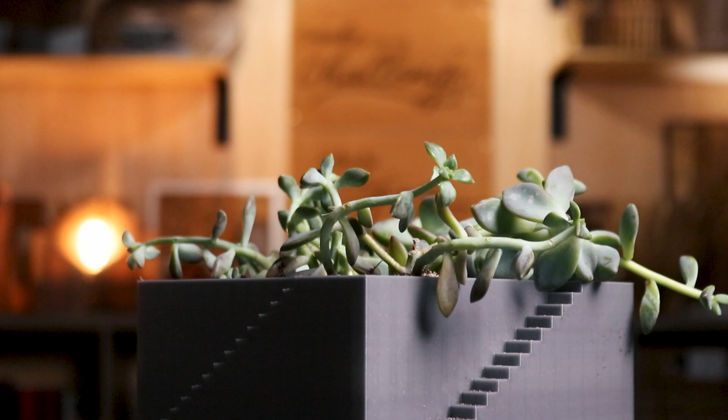There are so many beautiful 3D printed planters and products being made all over the world. From a quick search on Google, you can see all the variations in design. After seeing all these projects, I was inspired to merge architecture with flower pot designs to create miniature worlds for houseplants.

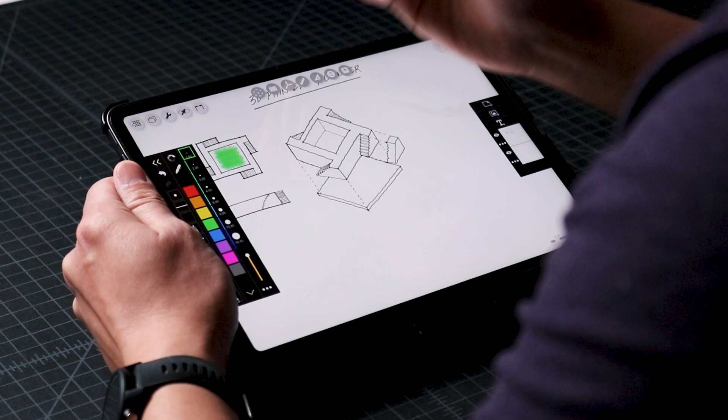To start, I came up with a quick sketch of my idea using my iPad Pro, Apple Pencil, and an app called Morpholio Trace, which I'll link in the description of this video.

The idea was to create an architectural plaza with stairs at 4 corners leading up to a walkway. At the center, there would be a void for soil and plants. At the bottom of the void, there will be 6 small drainage holes so excess water comes out of the bottom of the pot. That means we also need to have a drainage pan to catch excess water.

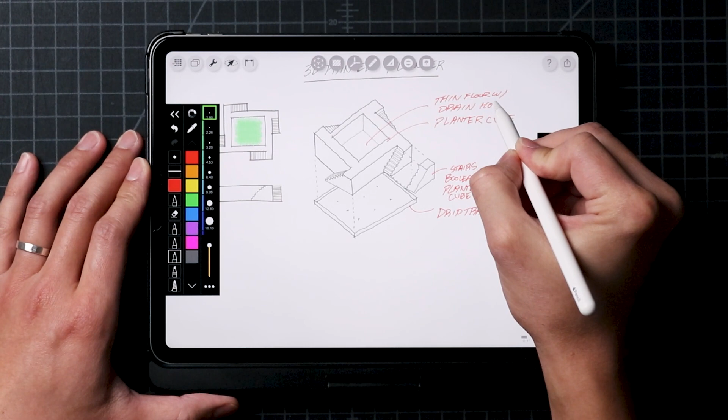The pan will have stubs that raise the planter off of the surface so that all the excess water can completely drain out of the pot.

With the sketch complete, the next step of the design process is to create a 3D model of the project, which we'll send to the 3D printer.

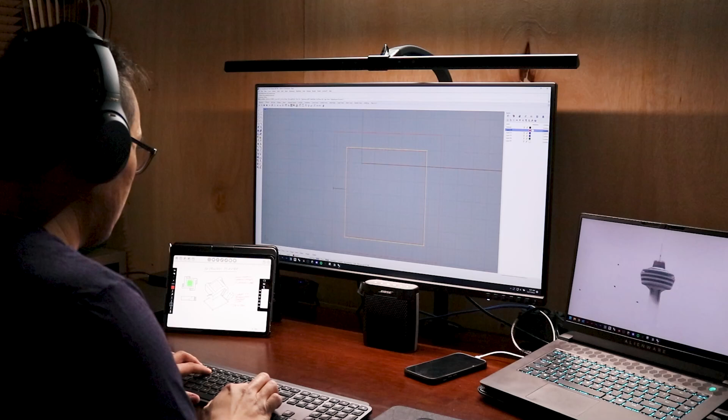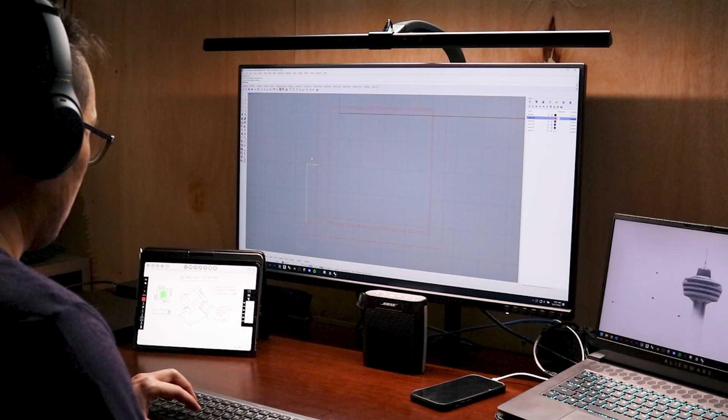After I drew the general shapes of this project, I outlined the shape of the staircase. When we get to the point where we model the stair in 3D, we'll see how it looks and see if we need a different proportion.

I have a feeling that the stairs will need to span the entire length of one side of the planter. The last thing we need to add to the design are the drainage holes at the bottom of the planter. I decided to go with 9 small holes that are evenly spaced to form a grid.

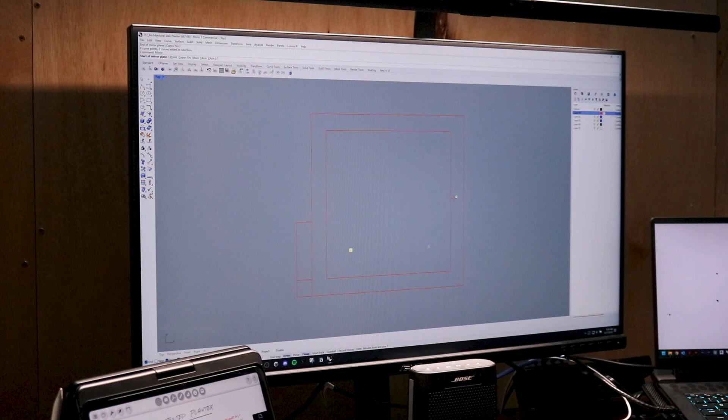Now we're ready for the fun part, extruding each component. Starting with the base, I extrude the overall square with the drainage holes to create a 1/16 inch thick platform. Next, I extrude the planter wall so that the top is 3 inches.

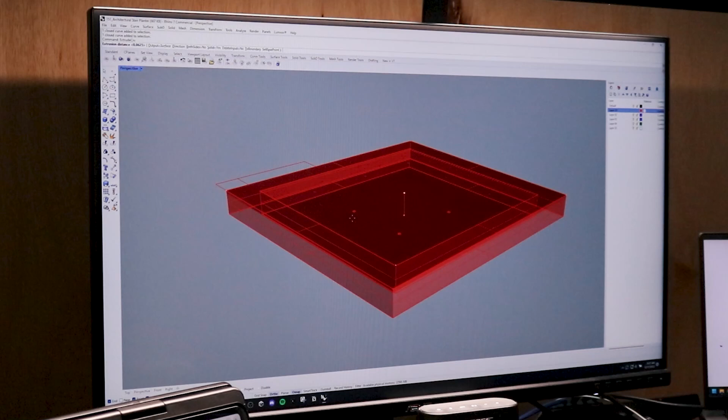I repeat these steps for the remainder of the shapes and start refining the design based on how it looks. I'll speed this part up, but all I'm doing is trying different proportions between height, width, and lengths. I'm also modeling the stairs, which are an important part of this design.

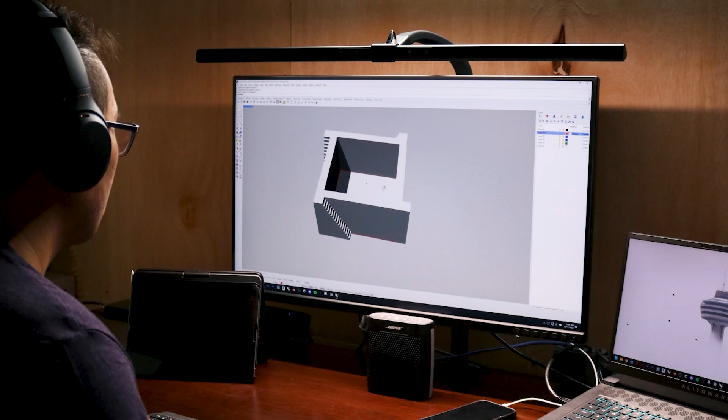This is what the first model looks like, which is based on my sketch. The only missing component is the drainage pan that raises the planter so water can drain out of the bottom.

I follow the same steps as before by drawing shapes to the sizes I sketched and extruding each one. Then, I use the Boolean union command to join them all together.

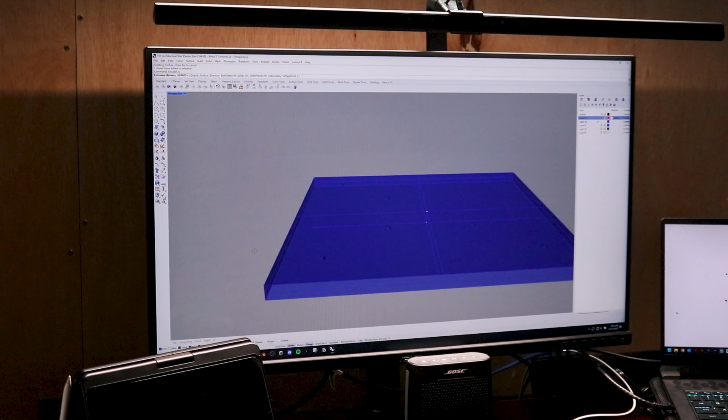With the model done in Rhinoceros, we're ready to export the file as an STL file type to Prusa Slicer to generate the G-code for 3D printing this project. If you've never 3D printed a project before, I know that could sound like something out of this world, but trust me, it's the easiest part of this project.

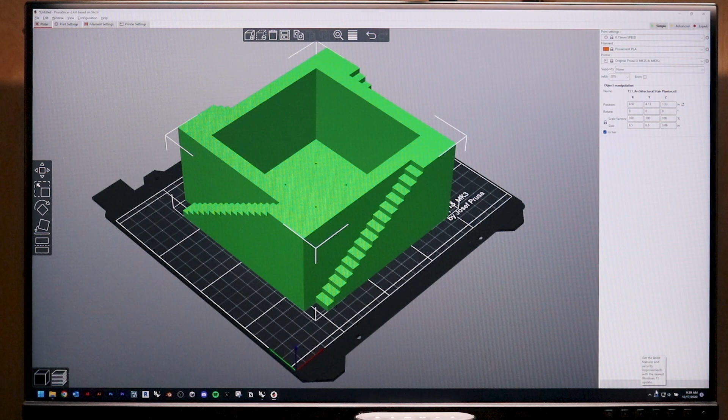First, we need to import the 3D model to Slicer. Then, we need to select the print option for the project. For this one, I didn't want it to take a long time, so I'll go with a faster option.

Now, we click Generate, and all the stats for the project, including total time to 3D print, is at the bottom right corner of the screen. The planter alone will take about 14 hours at a fast setting. A highly detailed setting would have taken 24 hours.

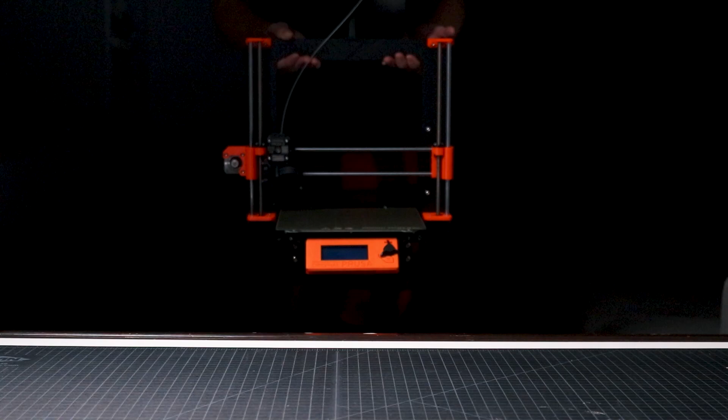Next, I bring my Prusa 3D printer to my workbench, save the G-code into an SD card, insert it into the 3D printer, and start the print.

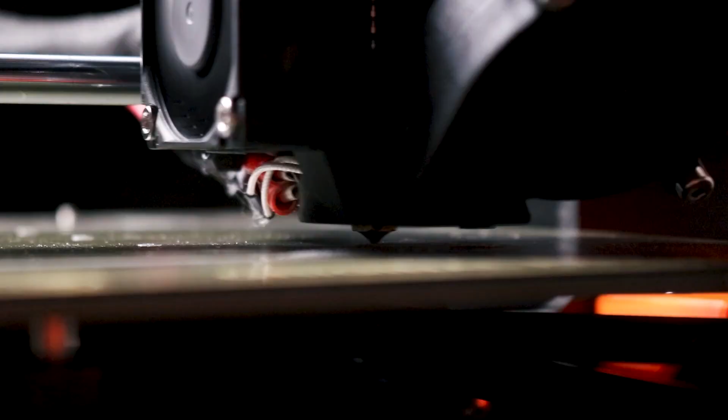This part of the project is still amazing to me because it's the moment when you can see a machine translate something that was once an idea in my head and on paper to a physical object.

Back when I was in architecture school, this was still considered a new technology and you needed to learn how to construct the printer, program it, and export G-code to operate it.

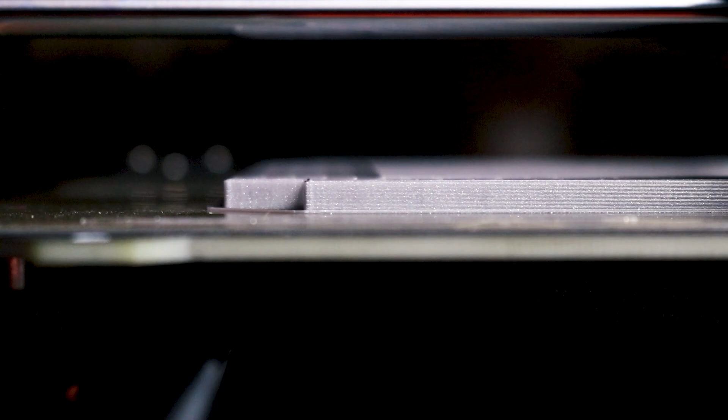Now, there are so many manufacturers who sell 3D printers as a complete package along with a slicing software and hundreds of filament types and colors. For this project, we're using a PLA filament and it's a Galaxy Silver color from Prusa.

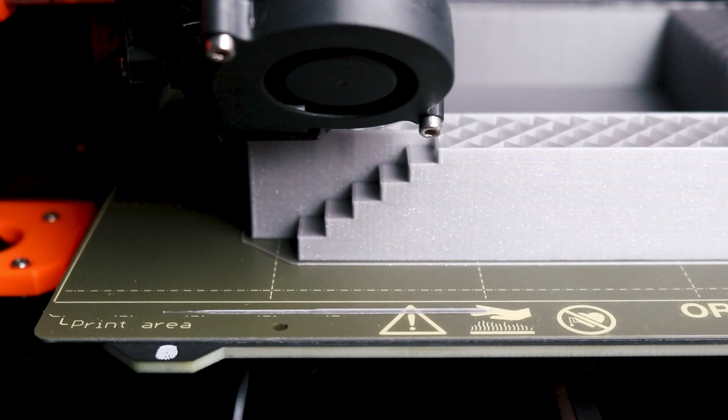After confirming the print is coming together properly with the first few layers, I let it run overnight until it's complete. By the next morning, I check on the print to see if everything went as planned, which it did.

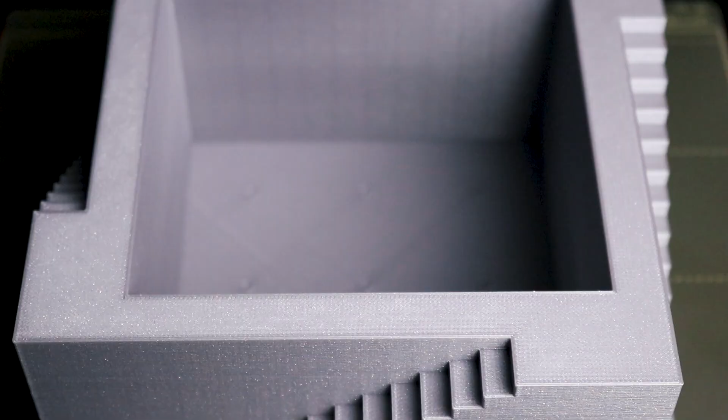You can see all the steps for the stairs and the entire planter is smooth all around. The drainage holes came out perfectly. Now we can lift the platform, bend it to pop the bottom of the planter off of the surface, print the drainage pan, and move to my workbench.

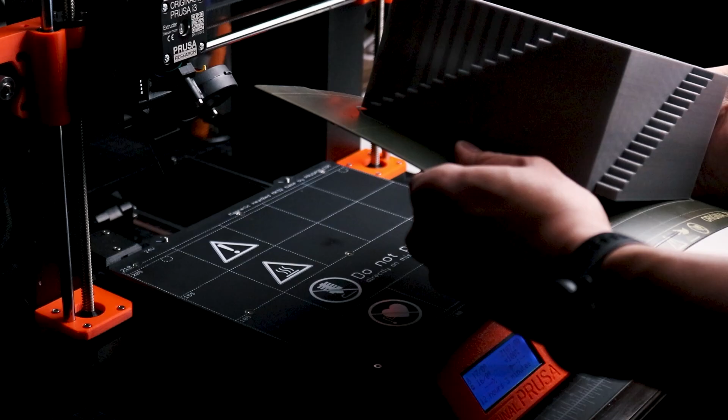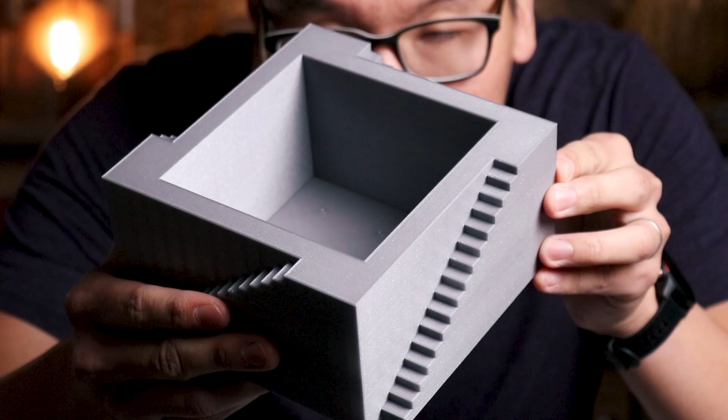I like to take a closer look at the print to see if there's anything that printed incorrectly and needs to be touched up. In this case, the planter and base looks great, so we can move on to the next step. I bring over a succulent plant that I've been growing indoors and start by loosening all the soil.

I separate the succulents from the soil and place them in a pile on my workbench. Then, I pour all the dirt from the plastic container into the staircase planter and even it out so it's level at the top. I make small holes with my fingers and transfer each succulent into their new home.

And this is how the architectural staircase planter came out. I love how the scale of the stairs against the succulents makes this product look like something from a science fiction movie where the plant is so much larger than the architecture around it.